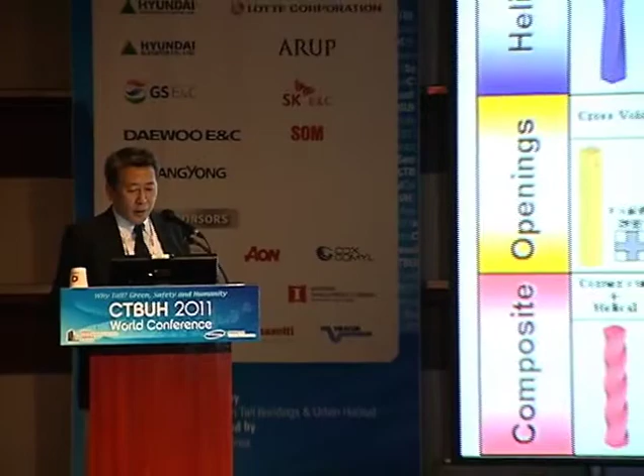So we did experiments for 31 models in 7 categories, using the high frequency force balance technique and a simultaneous pressure measuring system.

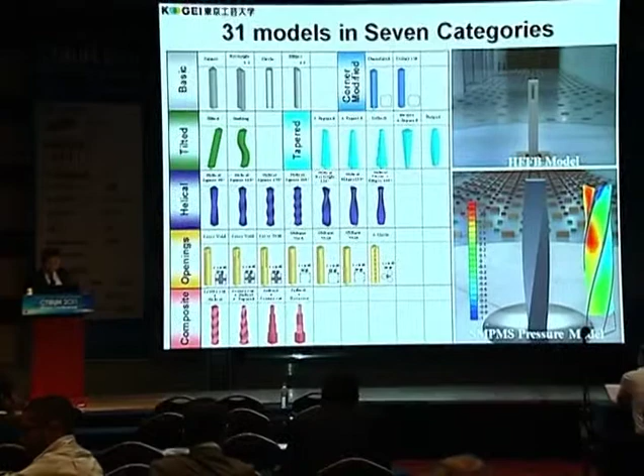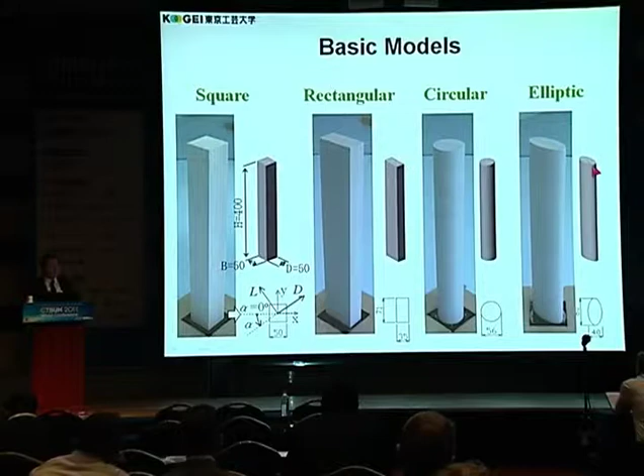As basic models, we tested 4 models, but basically we are interested in the square; the rectangular, circular, elliptic shapes are kind of reference. Especially circular and elliptic, we should discuss the Reynolds number effect, so this is just for reference.

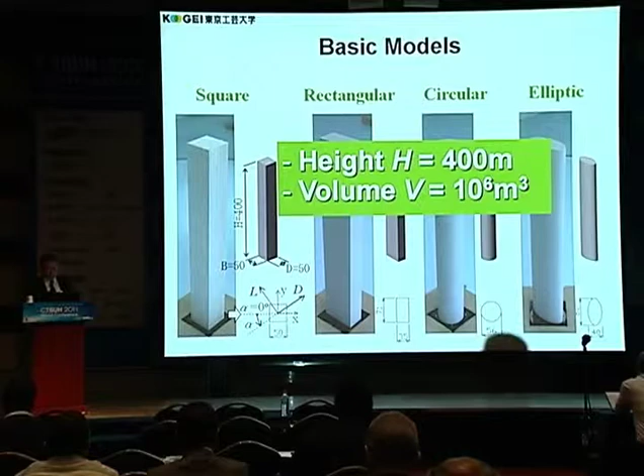Height was set at 400 meters for all models, and volume was set at 1 million cubic meters. So these 2 conditions are always kept for different shapes.

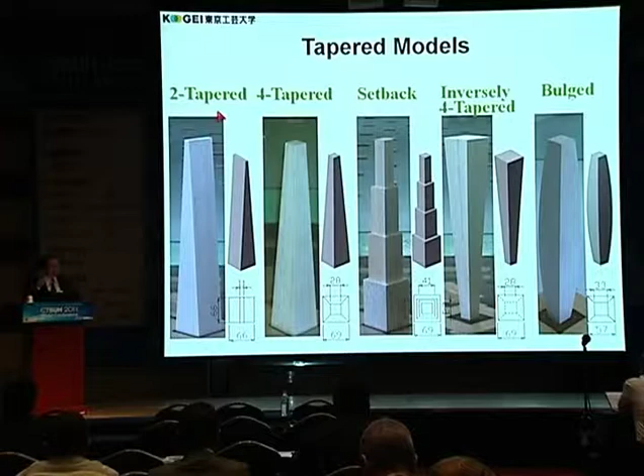So corner chamfered, corner cut, tilted or winding, and tapered models, 2-tapered, 4-tapered. The 2-tapered becomes rectangular near the top, and setback, inversely tapered, and bulged. And helical models, different type twisting angle, 90 degrees to 360 degrees.

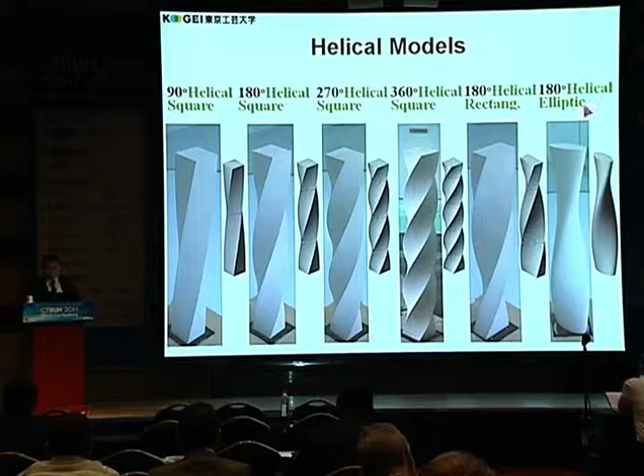And also 2 additional helical models, rectangular and elliptic. And different types of opening models, cross opening and oblique opening with different opening ratios.

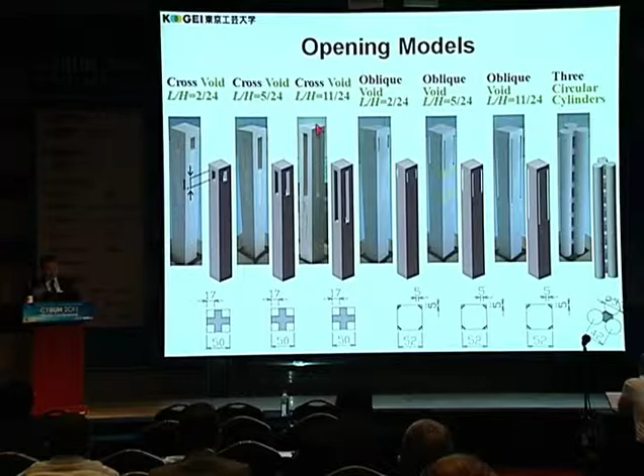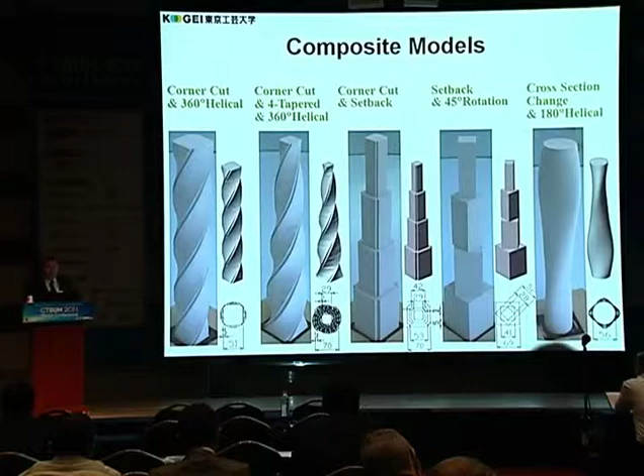And also we studied composite types, a combination of corner cut and helical, corner cut tapered helical, and corner cut setback, and so forth. So we did not expect significant effects of the combination, but the result was different.

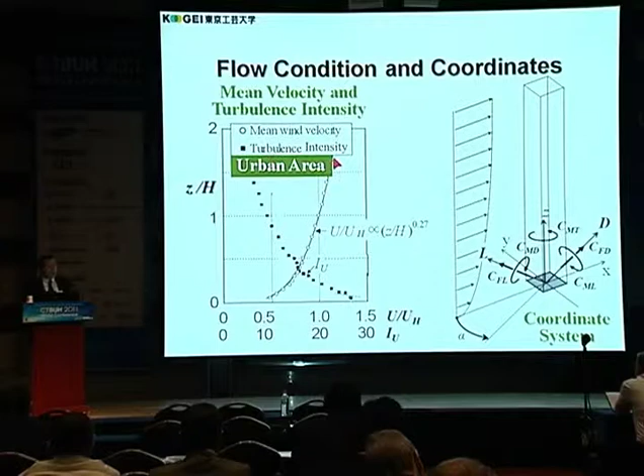So when the condition was set as shown here, an urban area was simulated, and this is an example of mean overturning moment coefficient for along-wind and crosswind. As you know, this should change as a function of wind direction. The left figure shows the along-wind case, and the right is crosswind.

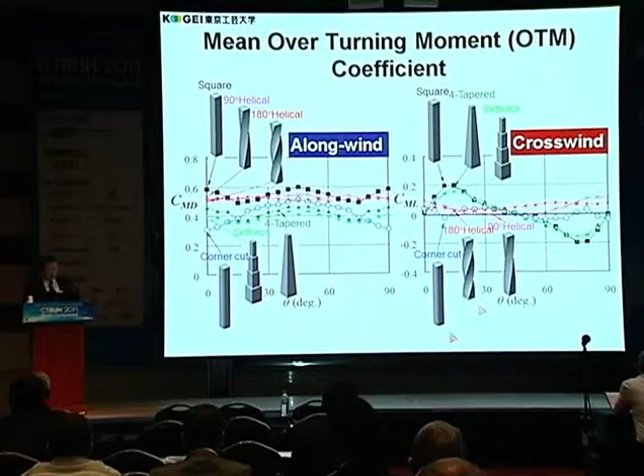We picked up the one maximum value among all wind directions for each model. This is only the example for 6 models, and we compared the result. This is also part of the result, only for 10 models we compared.

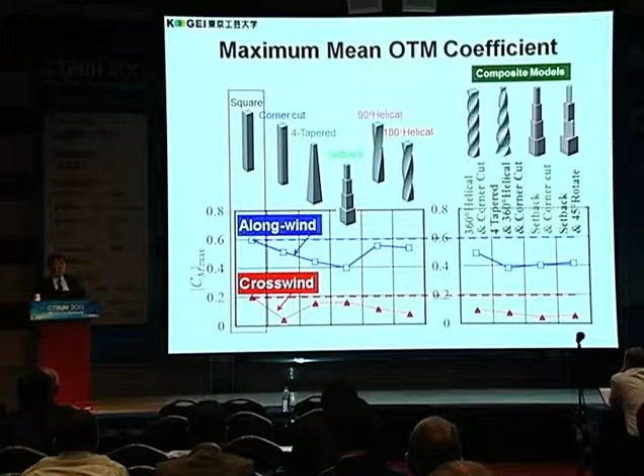So the left end is square. If the value is lower than these 2 lines, the aerodynamic behavior is better than square. Corner cut, taper, setback, all models show better than square model, even for mean value. We were just changing the shape aiming to minimize the crosswind force, but even for along-wind, the performance is good.

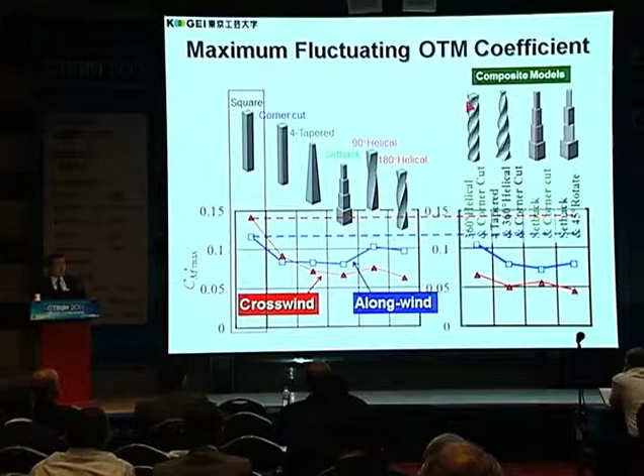This is the fluctuating overturning moment coefficient for the same 10 models. As you can see, almost all models perform better than square. Especially for the fluctuating component of crosswind, significant reduction is made for the composite model, so the combined effect is also significant.

This is the power spectrum of crosswind overturning moment. You can see the spiky peak for the square model, and you can see some reduction of the peak due to different configurations. Incidentally, the 500-year recurrence wind speed level in Tokyo is almost close to the peak of the spectrum.

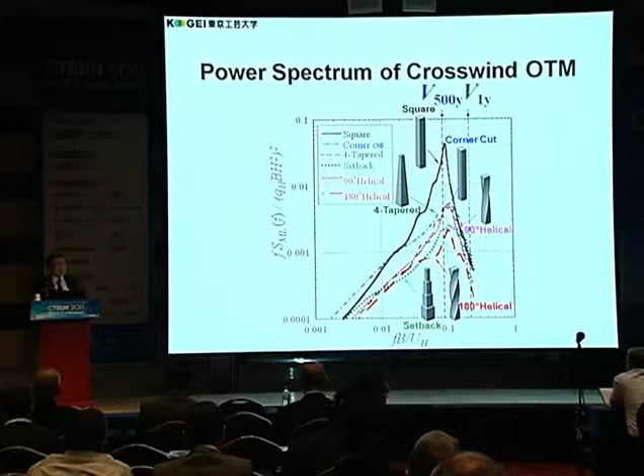So we compare the value of the peak, and we are also interested in the 1-year recurrence wind speed level, because in Japan we evaluate habitability, human comfort for wind-induced motion, based on the 1-year recurrence acceleration. So we compare the value of the power spectrum of crosswind force.

For the 500-year recurrence wind speed level, all 9 models are better than square, and significant reduction is observed for the composite model. The value is the square root of the reading of the peak.

Significant reduction is obtained for these 3: 4-tapered helical and corner cut combination, setback and corner cut, and setback and 45-degree rotation. So this result is very good.

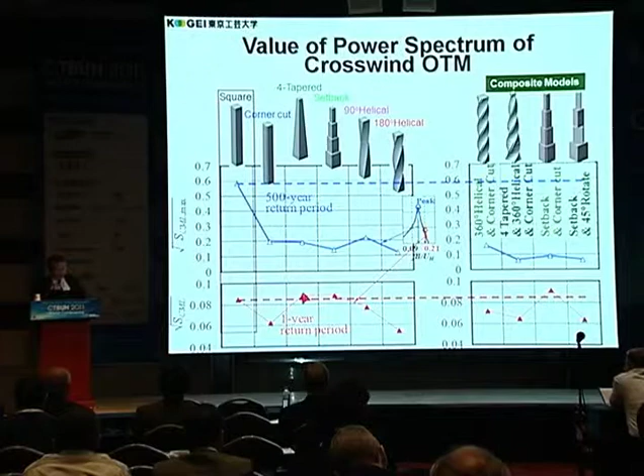But for the 1-year recurrence wind speed level, the performance is not necessarily good—not so significantly bad, but worse than square for some cases. This is an overall comparison in terms of mean wind force along-wind and crosswind.

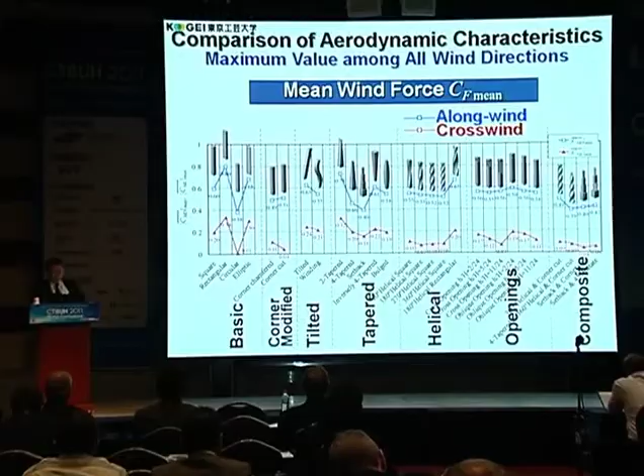Again, the left end is square. So you can see the rectangular model, tilted, tapered, two-tapered, and helical rectangular.

This rectangular type is not so good for the mean component. And crosswind shows almost the same tendency, so you can see some correlation between along-wind and crosswind in mean wind force components.

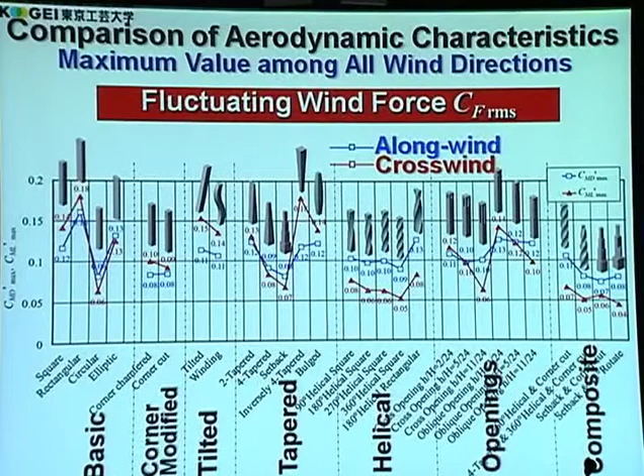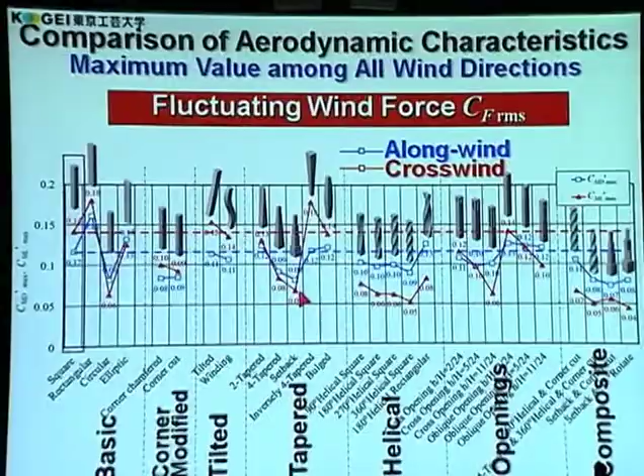This is interesting. For the fluctuating component, you can also see the rectangular is not so good, and inversely tapered and tilted are not so good. But other models show better results than the square model, especially for crosswind, and you can see some correlation between along-wind and crosswind fluctuating components.

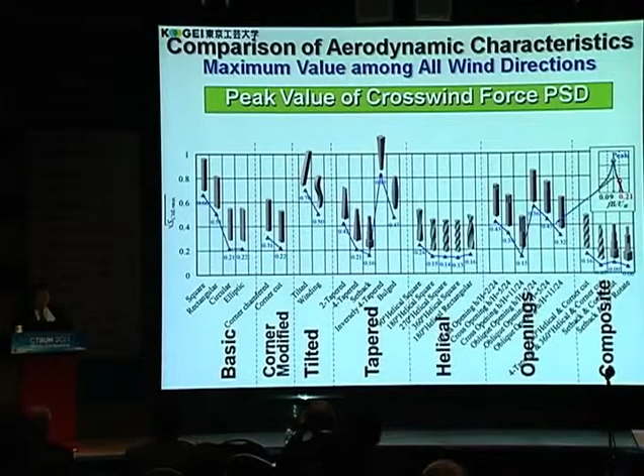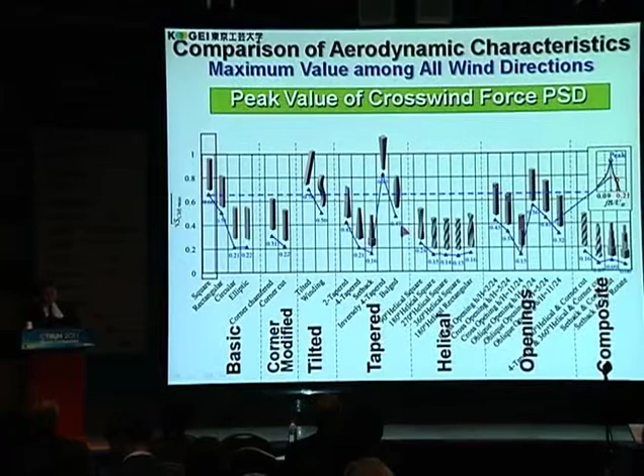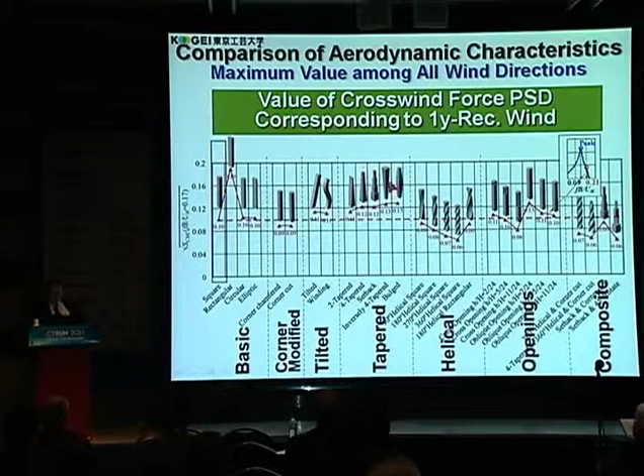This is the peak value of the crosswind force spectrum for a 500-year recurrence level. Again, the tilted and inversely tapered are not so good, but others are good, especially helical model and composite model which showed very good results. For the 1-year recurrence, as already seen, some models are not so good, but helical and composite showed very good results.

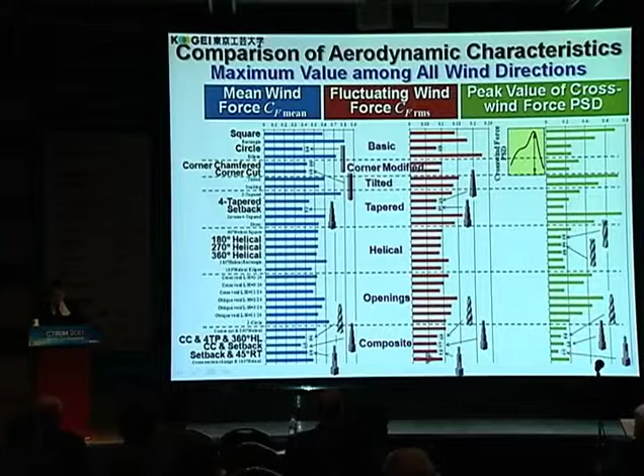This is an overall comparison of the mean component, fluctuating component, and peak value of the crosswind force spectrum. I selected only the top 6 in each category, but please see the composite type, especially for the fluctuating component and peak value of the crosswind spectrum - the top 3 best are from the composite type. So composite type is very good.

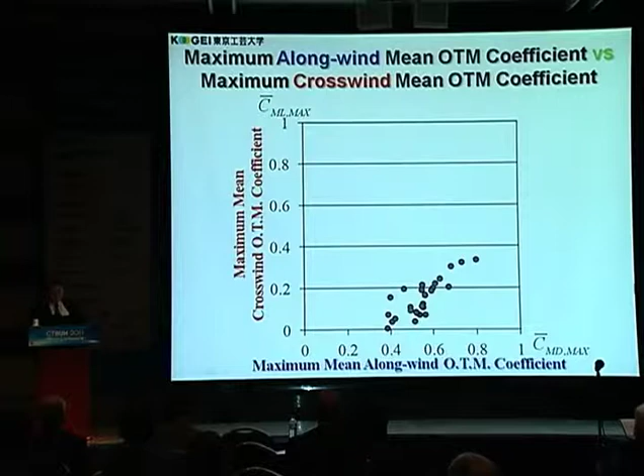This is the correlation between along-wind mean and crosswind mean overturning moment coefficient. As already seen, we observe some correlation - not so clear, but some correlation we can observe.

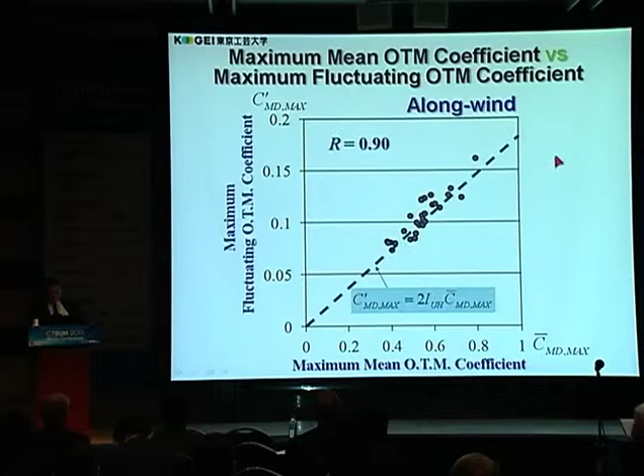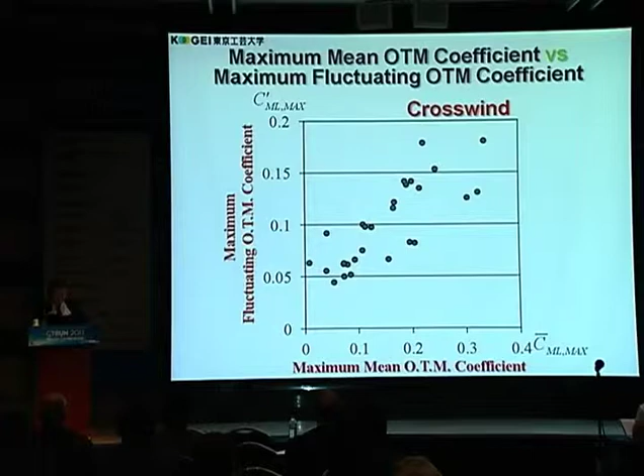Also, between fluctuating component and mean component for crosswind, in this case the correlation is not so high. Dispersion is very large because the source of fluctuation for crosswind is due to Karman vortex, but the mean component is different - that is the reason.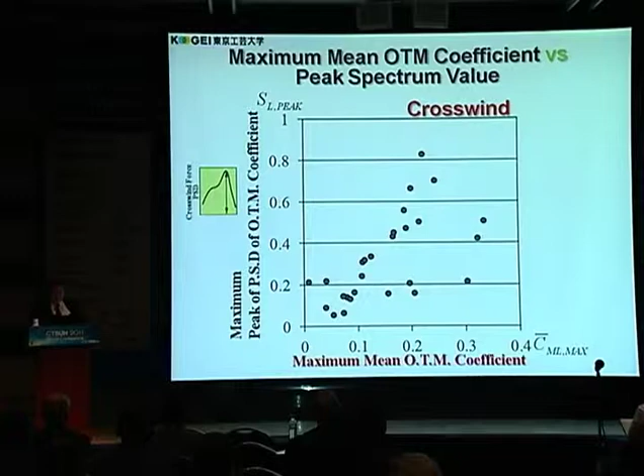The peak value of the spectrum and the mean value of the overturning moment coefficient for crosswind show such a scatter, so not so high correlation. But of course, the fluctuating component of crosswind force and peak value of the spectrum show very high correlation.

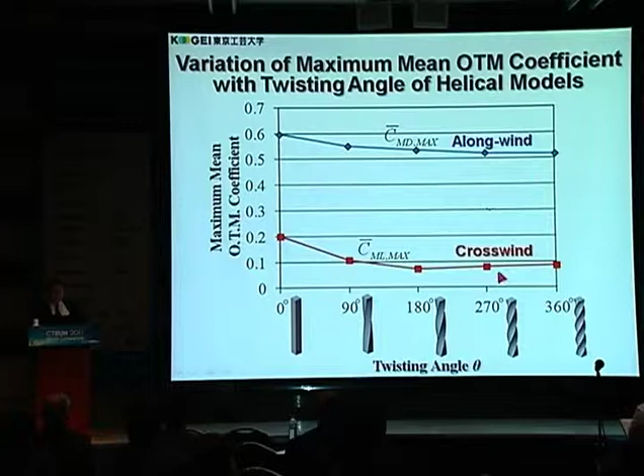This is the effect of the twisting angle on the mean overturning moment coefficient for the helical model. You can see even for the mean value, along-wind and crosswind show some reduction of wind force due to twisting angle. More clearly, the crosswind fluctuating component shows the reduction due to the twisting angle.

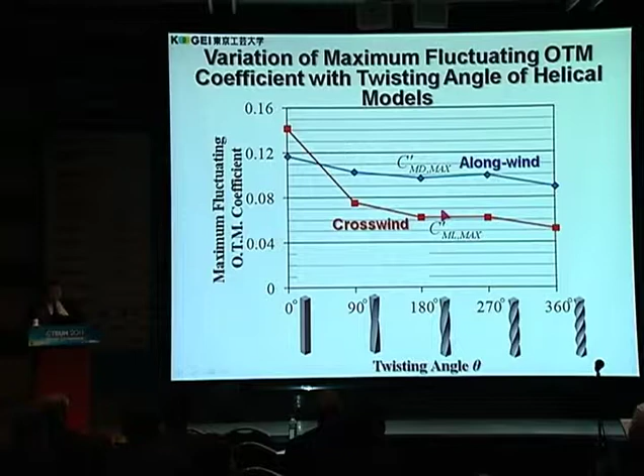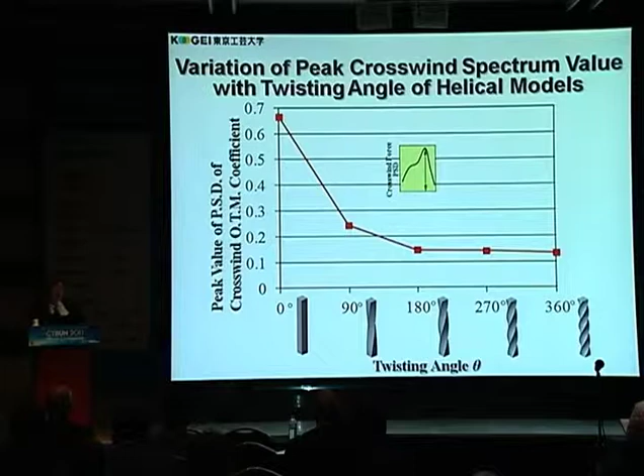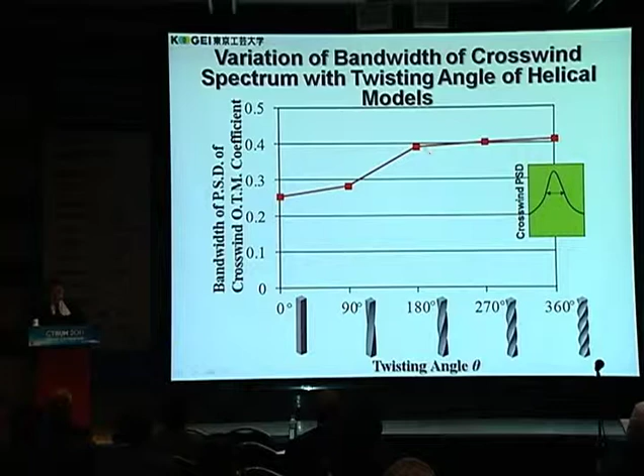This is the variation of the bandwidth of the crosswind spectrum. For the definition of bandwidth, we followed the definition by Professor Vickery for chimney. Based on that, the bandwidth increases with the increase of the twisting angle, and reaches almost saturation from 180 degrees. So a better situation happens due to the twisting angle.

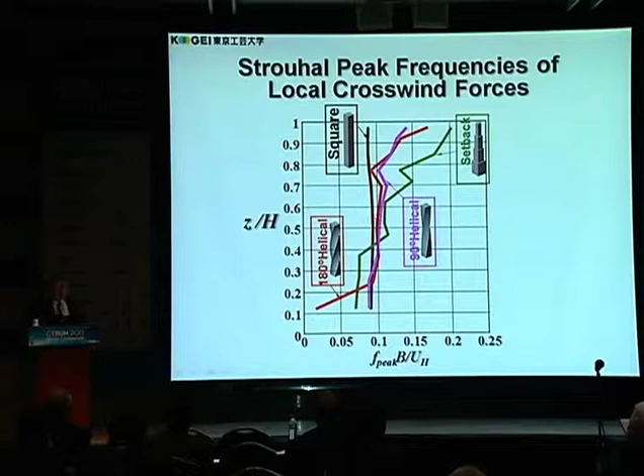But for setback or helical models, we see a change of frequency from bottom to top, suggesting not well-organized Karman vortex shedding. This is also a similar result for the composite type, with even more significant change of frequency observed.

A very interesting result is obtained for setback - two different types: ordinary setback and setback with rotation. Ordinary setback shows a gradually changing tendency of the frequency, meaning the upper and lower parts affect each other. But in the case of setback with rotation, the frequency is clearly separated, so an uncorrelated situation happens. This is very interesting.

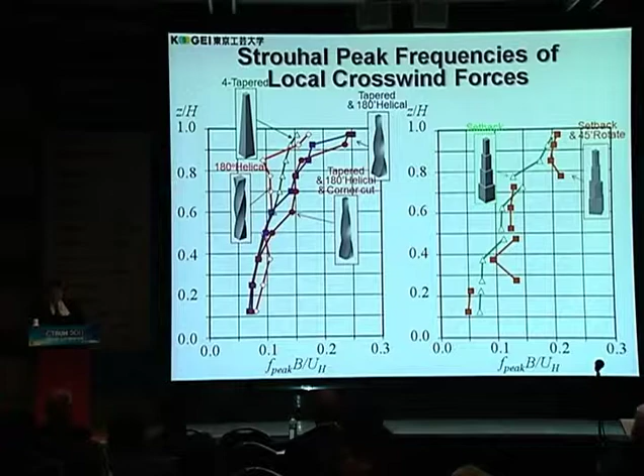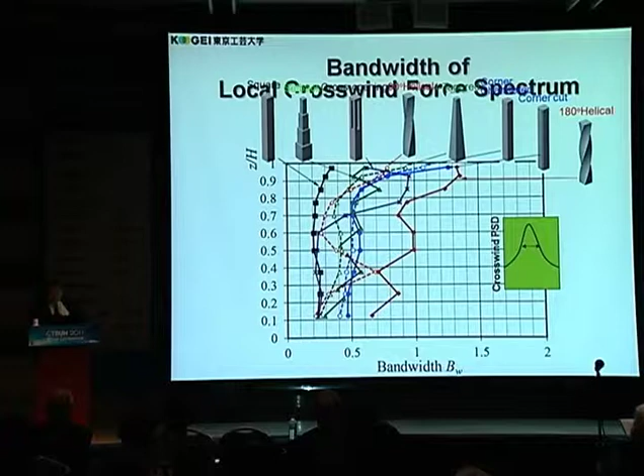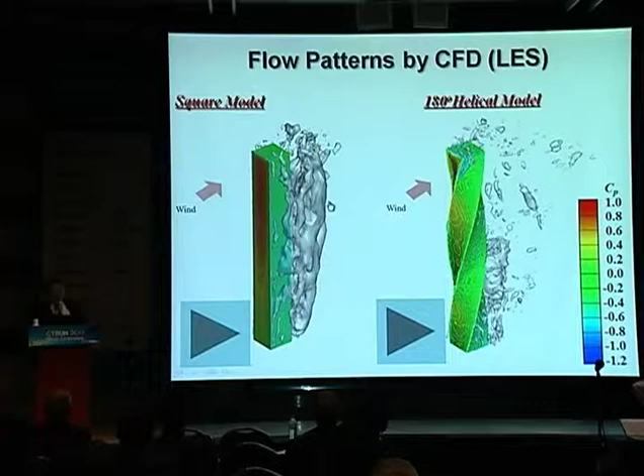This is the flow pattern from CFD to check the mechanism of reduction of crosswind force, but I checked the video in the preparation room and could not make it work. But you can see well-organized vortex shedding from the square model, while the helical model shows a very separated and dispersed situation.

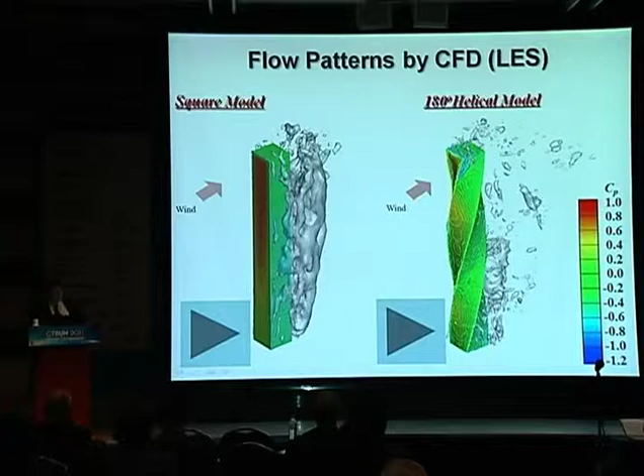Next, I will briefly show the combination of wind forces. This is the case of a square model.

The along-wind and crosswind trajectory becomes like this, along-wind and torsional moment, and crosswind and torsional. The torsional moment and crosswind fluctuations come from almost the same source - Karman vortex shedding is the main source, so these two are well correlated, showing some positive slope.

But the combination is almost symmetric, meaning no correlation. However, when we look at the maximum value, a wedge-shaped trajectory suggests the simultaneous occurrence of maximum crosswind and maximum along-wind. That is a special feature of the square model.

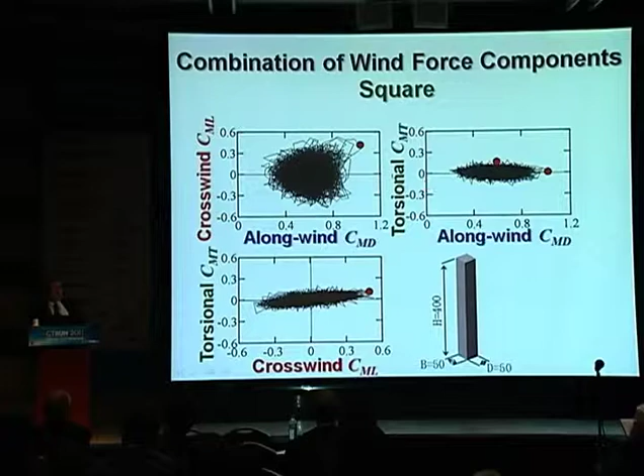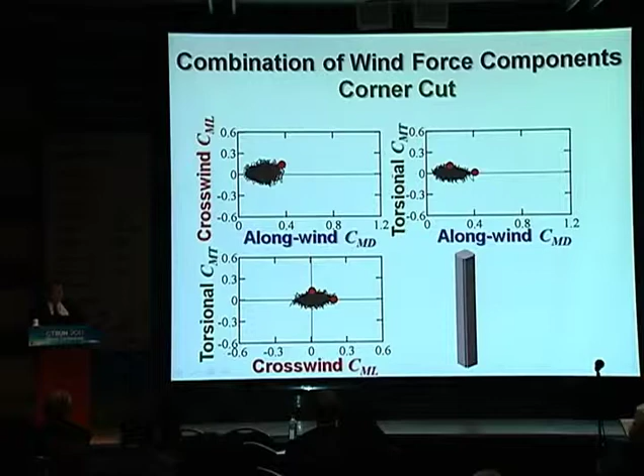But if you change the configuration - this is a corner cut - that situation disappears. Some still remains in this case, but for the helical model it becomes an almost elliptic shape with no correlation and no simultaneous occurrence of maximum crosswind and maximum along-wind. That is another improvement in the aerodynamic behavior.

For the tall building model with a different configuration, maximum crosswind appears with an almost average level of along-wind, and maximum along-wind appears with almost zero crosswind value. So this combination is better than the square model.

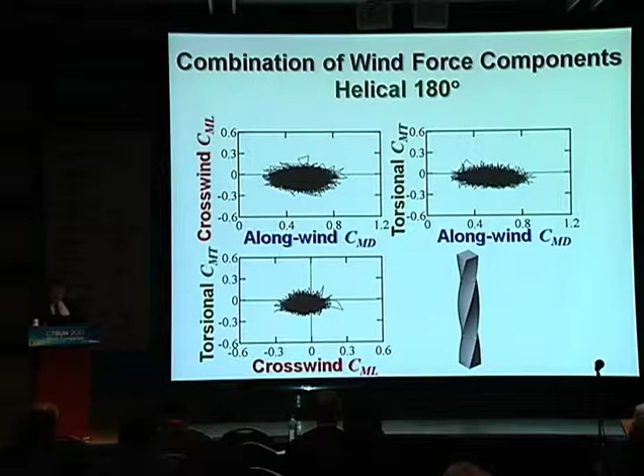So this is just the start - we began the combination analysis of wind force components for different models. In the future we can discuss this in more detail.

This trajectory I showed is the combination of along-wind and crosswind. The wedge shape changes to an elliptic shape and becomes thinner and thinner due to the change of shape. The ordinate indicates crosswind force, so if the trajectory is thin, that means the crosswind component is less than the square model.

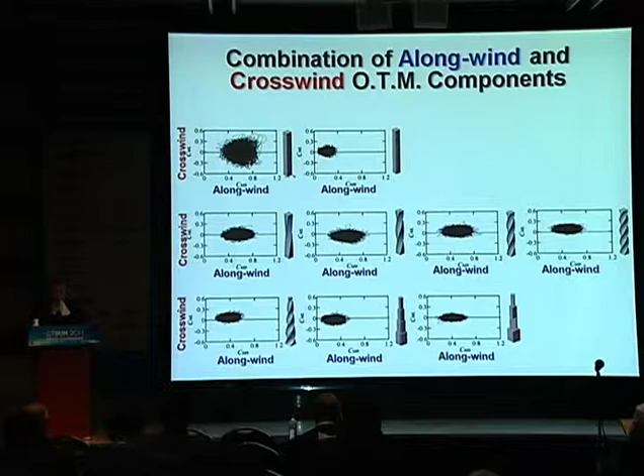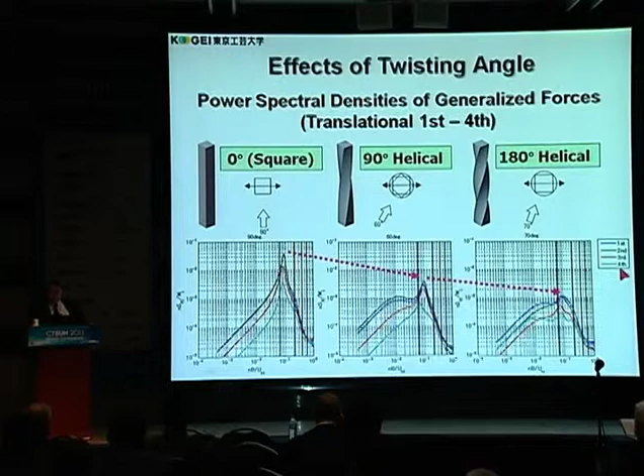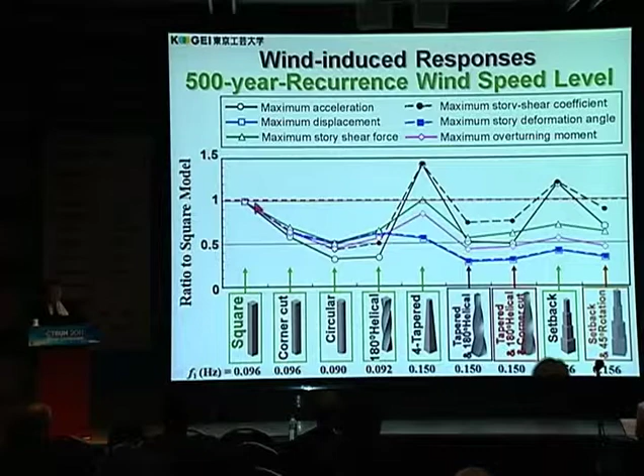This is a result of the wind-induced response analysis for the 500-year recurrence wind speed level. Blue indicates the maximum displacement and story deformation angle, so I think it's better to compare by looking at the blue value. All composite type and helical models showed much better results than the square model.

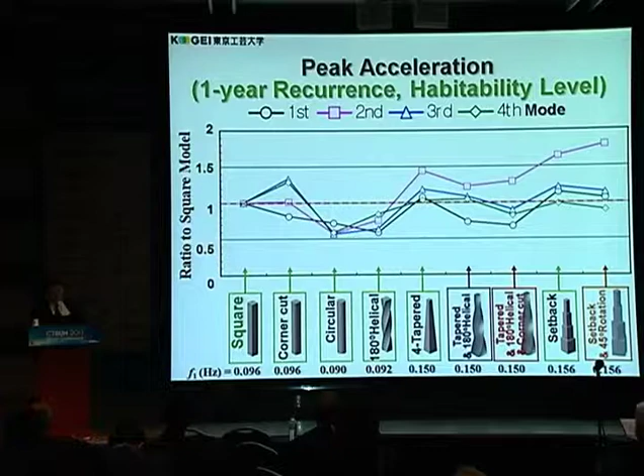But for the 1-year recurrence peak acceleration, they're not necessarily better than the square model, so this should be approached carefully in design. Okay, thank you very much. I'd like to conclude my presentation. Thank you.

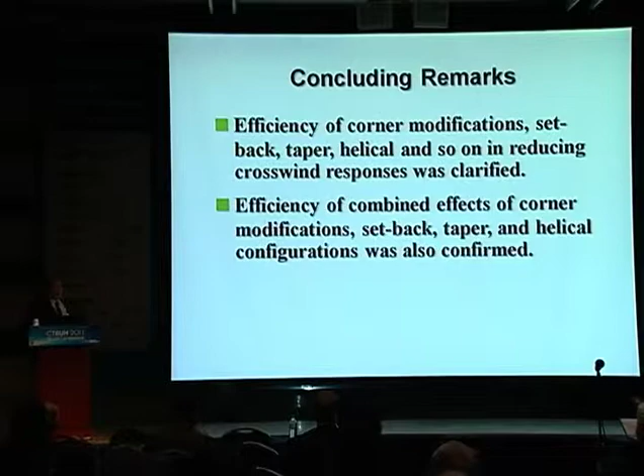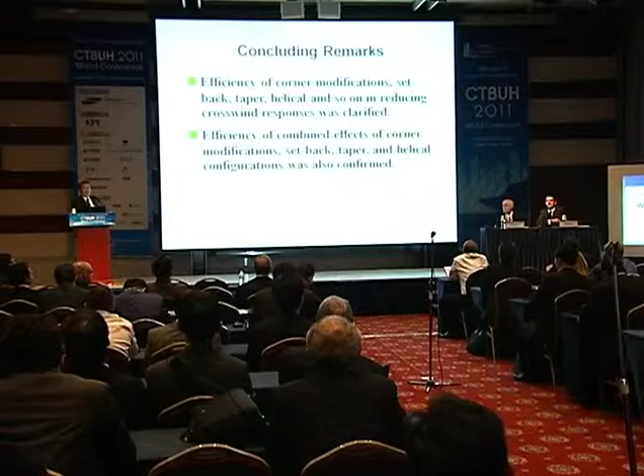Yes, we did not check the different heights case, but the frequency can be different for the different shapes. So the frequency effect appears in the response, but the spectra only show the aerodynamic force component, so such an effect does not appear there. But we have not checked that effect.

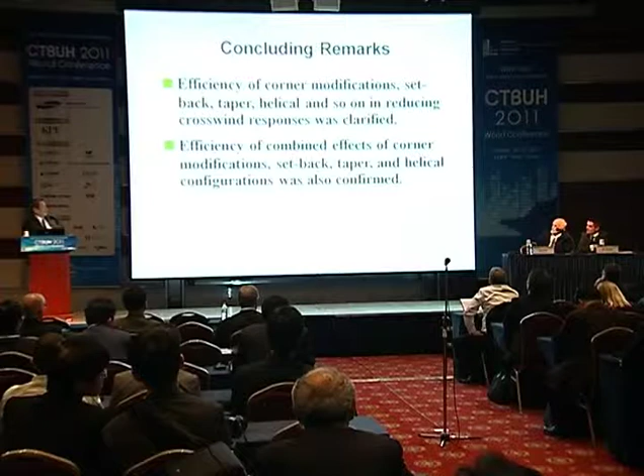The figure I showed is based on the same natural frequency. Later, some structure designers collaborated with us to calculate the natural frequency depending on the structural model, the FEM model. So we have frequency differences, but not a very significant difference, so in that preliminary study we set the same natural frequency - the same reduced frequency for both the 1-year recurrence and the 500-year recurrence.

Just to continue, you must have assumed the wind climate - was that typical? Yes, only the 500-year recurrence is based on typhoon records, but the 1-year recurrence is based on daily wind, basically in Japan. Okay, thank you.